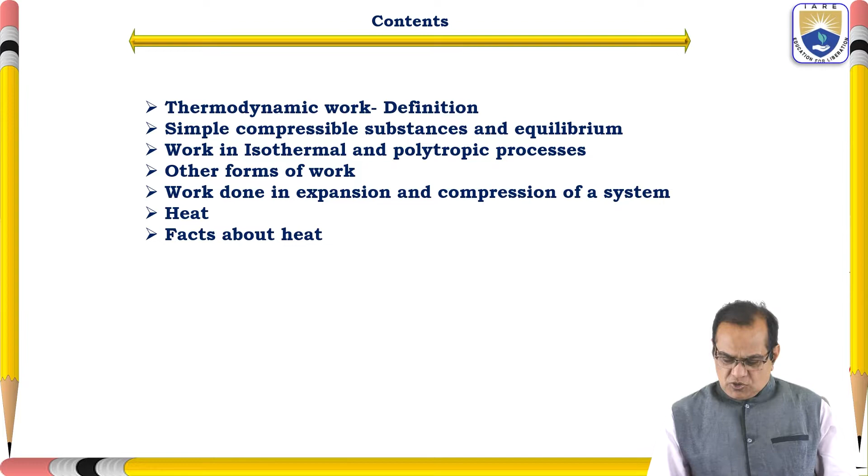So today I will go with thermodynamic work, its definition, a very important and very classical definition: work is done by a system if the sole effect on the surroundings could be that of raising a weight. We have to find the keywords here: the sole effect on the surroundings could be that of raising a weight.

Very important. We should understand it, then only we can apply the knowledge of work, and it is a could be, not 100%. Work is done by a system if the sole effect, the total effect on the surroundings could be that of raising a weight. So suppose this is your system, this line is the boundary of the system, and here we put some rope and some weight.

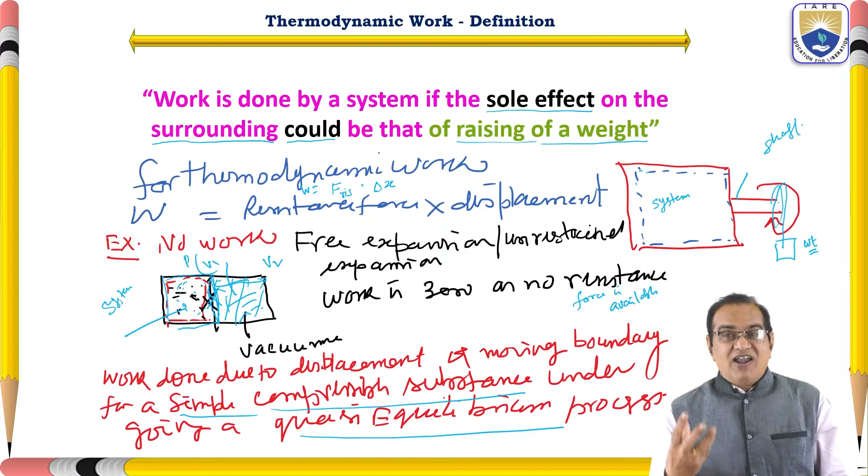So we have to understand what a simple compressible substance is. It is very essential that every student understands what a simple compressible substance is and what a quasi-equilibrium process is. Only if we understand these two things can we apply thermodynamic principles and equations, because all these equations are derived under these two conditions. So we have to see how it is happening.

So I will discuss here first simple compressible substance and equilibrium. Simple compressible substance: where only pressure, volume and temperature are significant, those cases we can deal as simple compressible substances. There is no electrical, there is no magnetic, these things are not considered. No surface tension, no other type of forces are considered. Only their thermodynamic properties like PVT and related to this PVT, like enthalpy, entropy, these things are only considered.

Those substances are called the simple compressible substance. So we should make sure that the process or the material or the substances which we use only follow PVT. They are not influenced by electrical force, magnetic forces, or gravitational or some other forces we are not considering. So most of our cases and all things which we are going to derive in the future classes, they all depend upon these simple compressible substances.

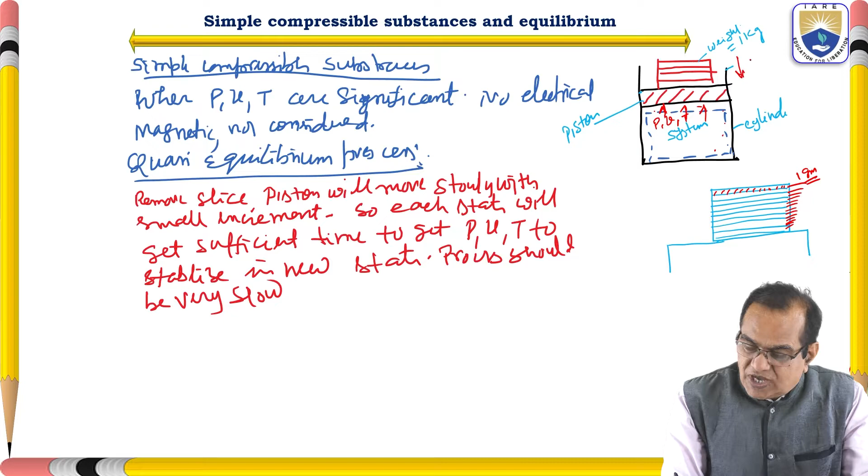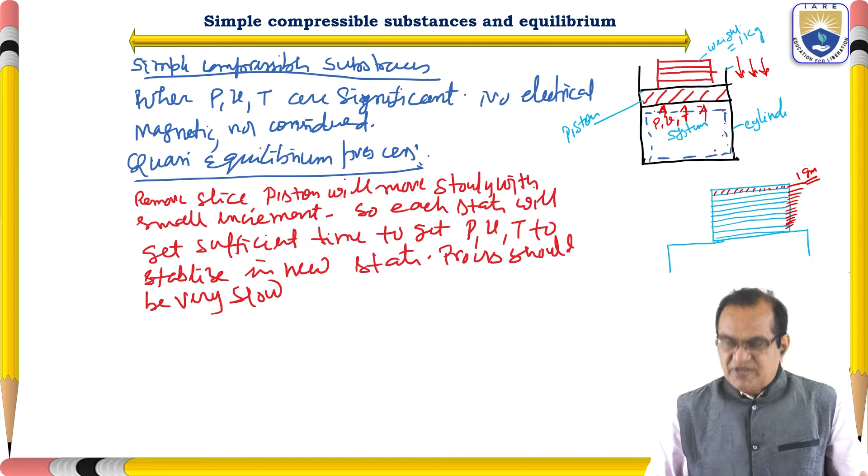Most of our discussion will be on quasi equilibrium process, because in this condition the resisting force is equal to the applied force. Applied force means the force acting from the bottom will be equal to the force acting on the top. So this is the equilibrium, meaning your state is in equilibrium. That is why it is called the quasi equilibrium process.

Now, work done by the system. This we have to understand, and see how the work can be done. So here I am showing two things. First is the isothermal process, and the second is the polytropic process. In isothermal process, PV is equal to constant. So here work done is always del W. We should not write dW. dW is the exact differential, but del W is inexact.

We should understand what is the difference between dW and del W. Del W indicates that it is inexact. It is not an exact differential. This will not give the point value; it has a path value. It depends upon the path. But dW depends upon the point.

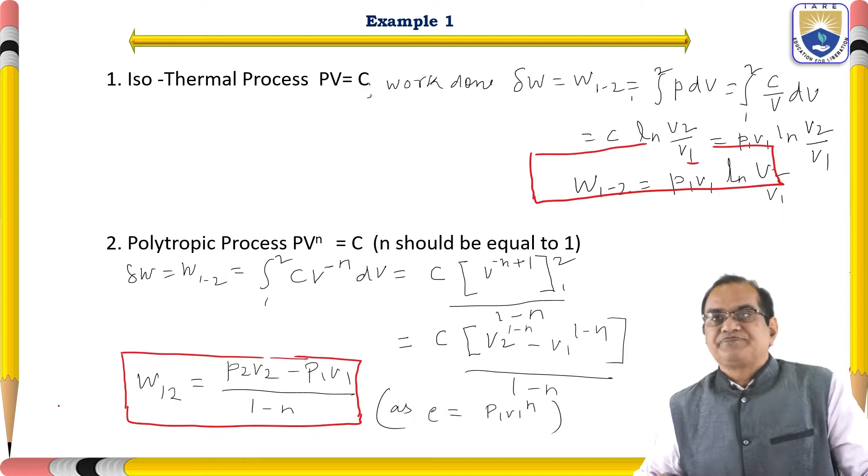So now I will go to the next issue, some other forms of work. We have done the simple PdV work, or thermodynamic work: isothermal, polytropic, constant pressure or isobaric, isochoric, all of which we can find out by the previous equations. But we have some other forms of work, like shaft work.

So if this is the shaft here, rotating with omega velocity, and there is a torque, what will be the work done? The rate of work done per unit time is equal to torque into omega, the rotational velocity. Work per unit time is called power. So power is equal to torque into rotational velocity omega. So this is shaft work, mechanical work.

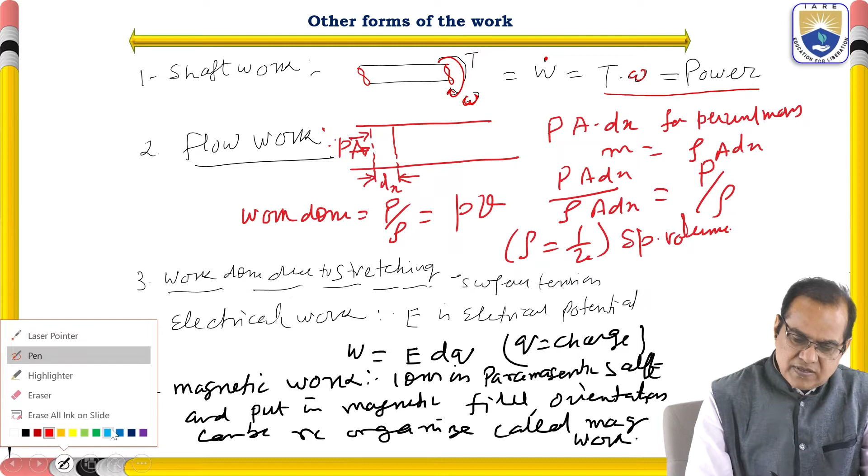Now if you see the flow work, you can see here that this is a pipe. Assume it is full of water. This is here one.

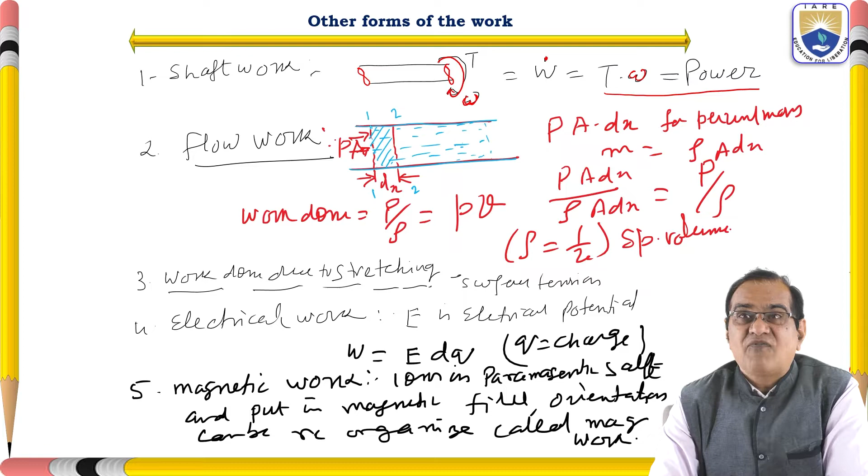The strip is here. So this is from 1, 1. It has moved to 2 and 2. Next point, 2 and 2. This first layer has to move from here to here. To move from here to here, on this side we need some additional force. Then only it will be moving. Okay, so here the pressure of the water is P, and the cross-sectional area, I am just showing here. This is the cross-sectional area. This area is A.

So how much force is applied here? It is P into A. This is the force. And how much distance is traveled? From 1 to 2 is delta X. So this is the work done. So work done is how much? PA into delta X, per unit mass. So M is equal to what? M is equal to density into volume. Density into area into dx.

So per unit mass, how much work is there? PA dx by rho A dx. A dx is cancelled. So here you will get P by rho. So work done per unit mass is equal to P by rho. And we know that rho is the inverse of the specific volume. So 1 by rho is equal to v. So here we got the flow work is equal to pressure into specific volume. Per unit mass, the work done is equal to pressure into specific volume. Very important, because this will be used in our future

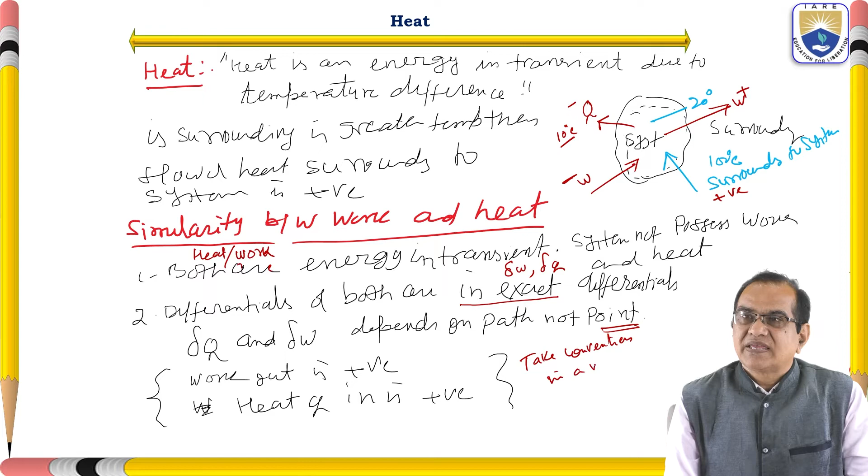The differentials of both are inexact differentials. Delta will be there, not d. So here δQ and δW depend upon the path, not on the point. Work out is positive, heat in is positive. This convention we have to take in a nice way. That we have to take care of.

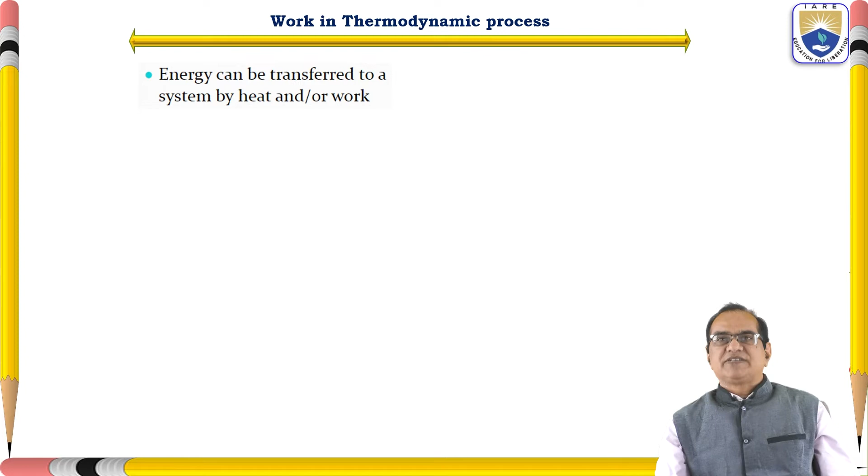So now I will give some important points on work in a thermodynamic process. Energy can be transferred to a system by heat or work. I am just summarizing what I have done. The system will be a volume of gas always in equilibrium. The system will always be inside the chamber, maybe air or gas or anything, and this will always be in equilibrium. Consider a cylinder with a movable piston.

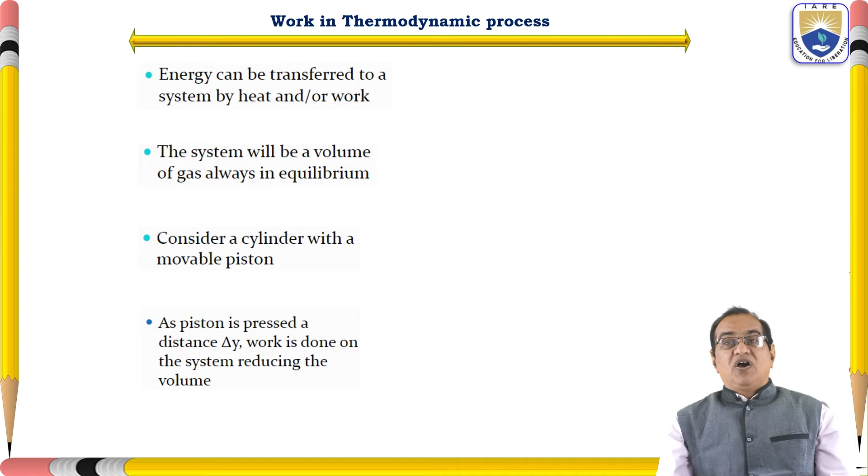A piston is pressed a distance Δy. Work is done on the system. So if the piston is compressed, work is done on the system, meaning it is negative work. You can see here there is a piston, there is a pressure and the volume. The volume is high here, and we have shifted this piston here. The volume is reduced now. This much you have gone down, so this volume is reduced.

So the pressure is positive. Is this work positive or negative? The work is negative because work is given. You see the arrow: we are pressing this shaft and it is compressed. So this work will be negative because V2 is less than V1. W is equal to P(V2 minus V1), so if it is less, W will be negative. A gas in a cylinder occupies a volume V at pressure P. Pushing the piston down compresses the gas, and this compression gives negative work, meaning work is done on the system, maybe by a motor pressing the piston.

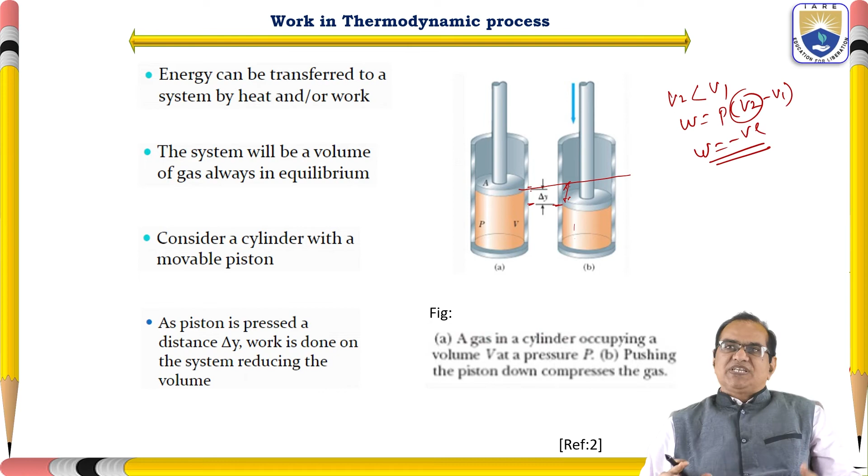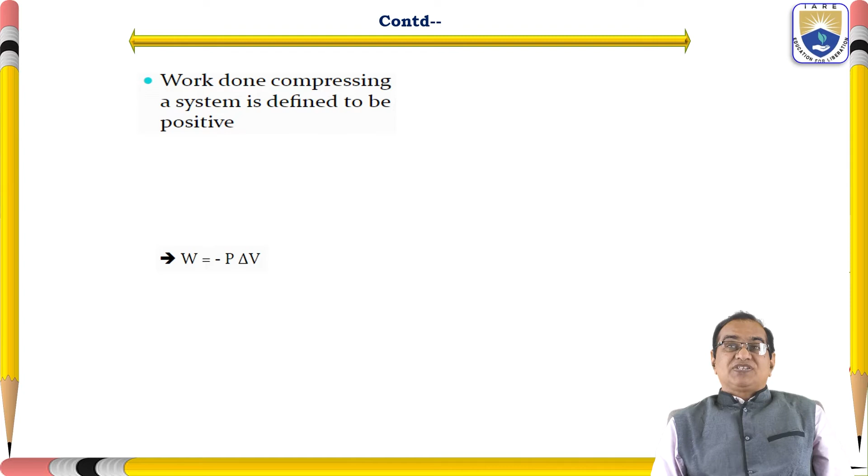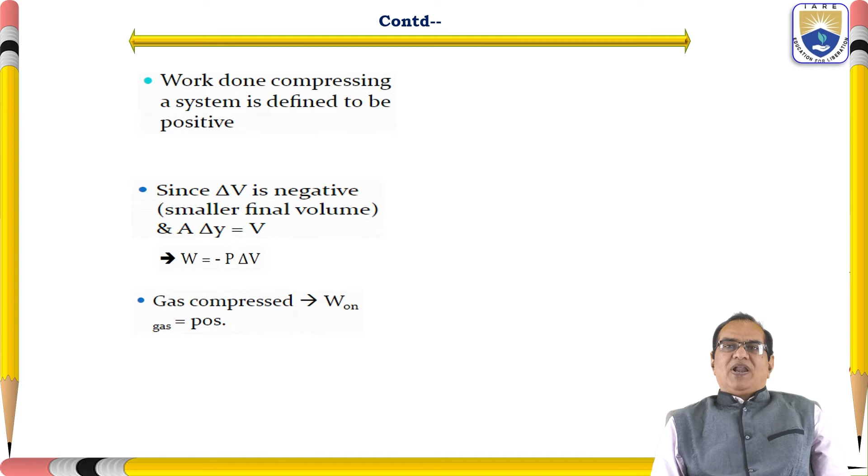Now we will see further. Work done compressing a system is defined to be positive. Since ΔV is negative, a smaller final volume, where A times Δy equals V, W is equal to minus P ΔV. Gas compressed, so work on the gas is positive. Gas expands, work on the gas is negative.

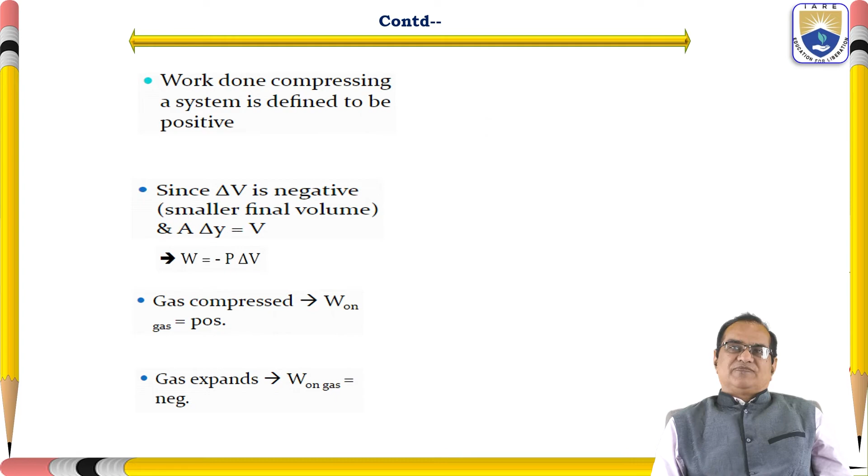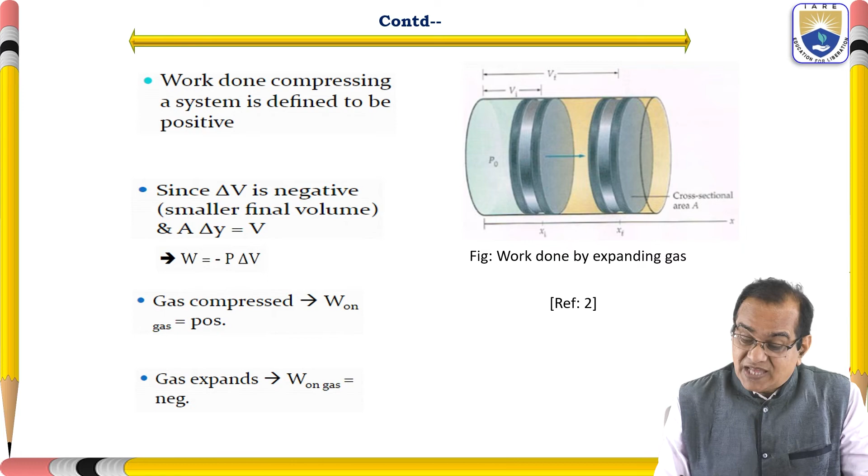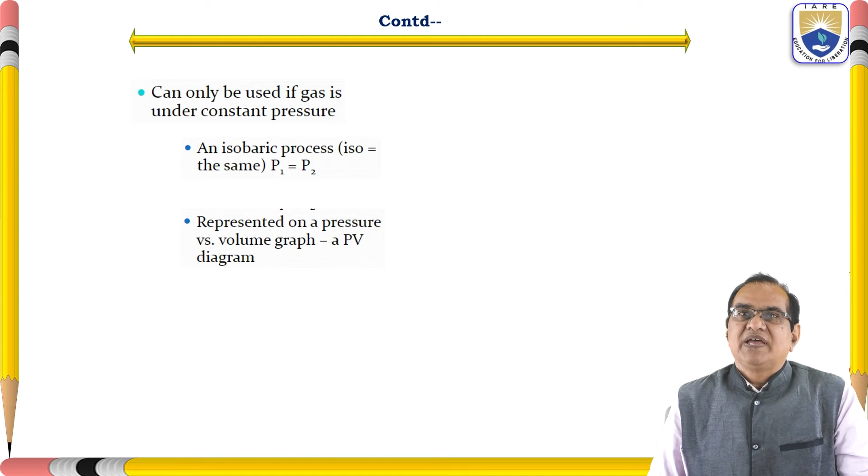This can only be used if the gas is under constant pressure. For this type of system at constant pressure, we can use an isobaric process where pressure is constant, that is, P1 is equal to P2. It is represented on a pressure versus volume graph, a PV diagram. The area under any curve is equal to the work done on the gas.

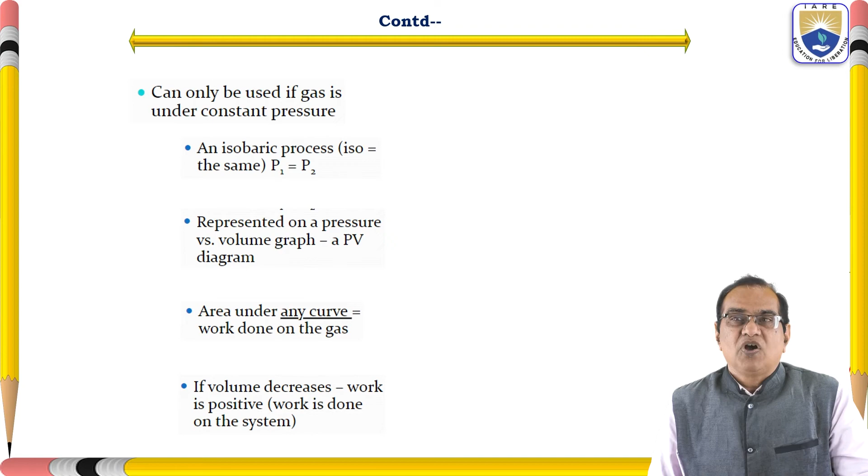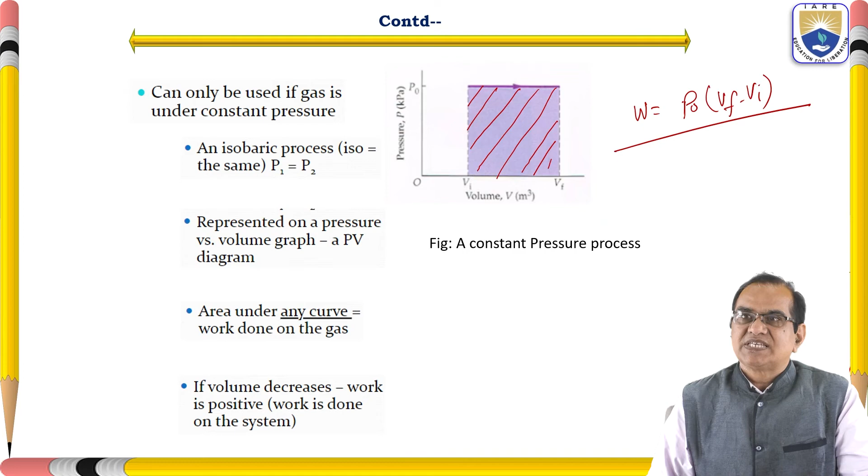This is the work done by a constant pressure process. You can see here a PV plot representing the constant pressure process shown in the figure. The area of the shaded region, that is P0 (Vf minus Vi), is equal to the work done by the expanding gases. So this much work is done by the expanding gases. Here I can give the reference.

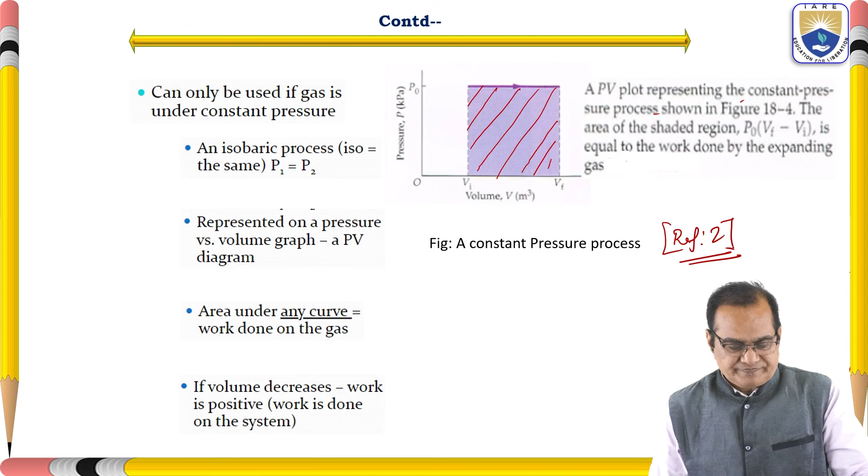Now I will discuss facts about heat. What are the facts about which we sometimes have confusion? That confusion has to be sorted out. Heat is energy that flows from something warm or hot to something cooler. Heat is always in transit, as I told. It will always move from the hot zone to the cooler zone. That we have to understand.

A hotter substance gives kinetic energy to a cooler one. So this is a transfer of kinetic energy. Hot will have more kinetic energy because molecules are moving very fast, and that is why it has more heat or higher temperature, and it will move from hot to the cool side. Heat is the transfer of energy between two objects due to temperature difference.

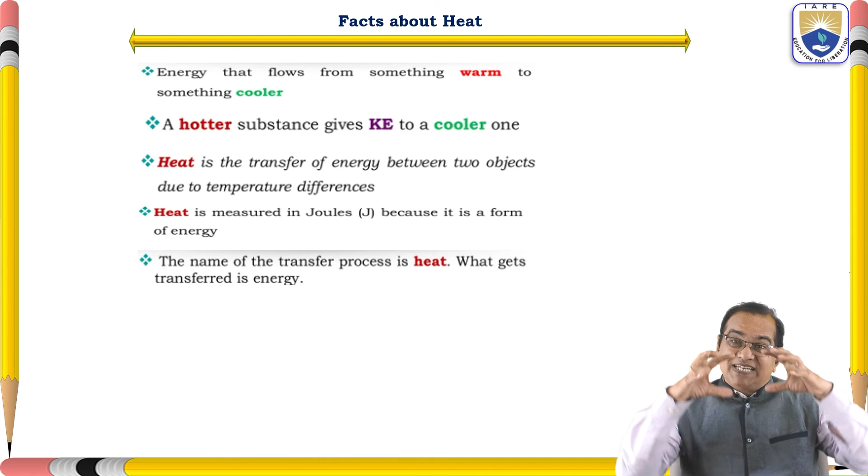Heat is measured in joules because it is a form of energy. Heat and work are both energy, and both have the same unit. The name of the transfer process is heat. This energy is inside, but when it is transferring, it is called heat. What gets transferred is energy, and the transfer is called heat.

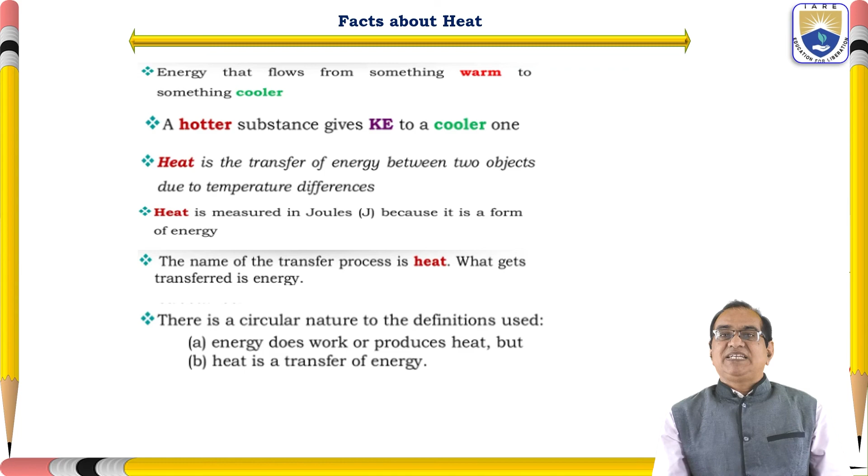There is a circular nature to the definition used. Energy does work or produces heat. Energy is the combination of work and heat, but heat is a transfer of energy. Very, very important facts are here. We should take care of this type of concept.

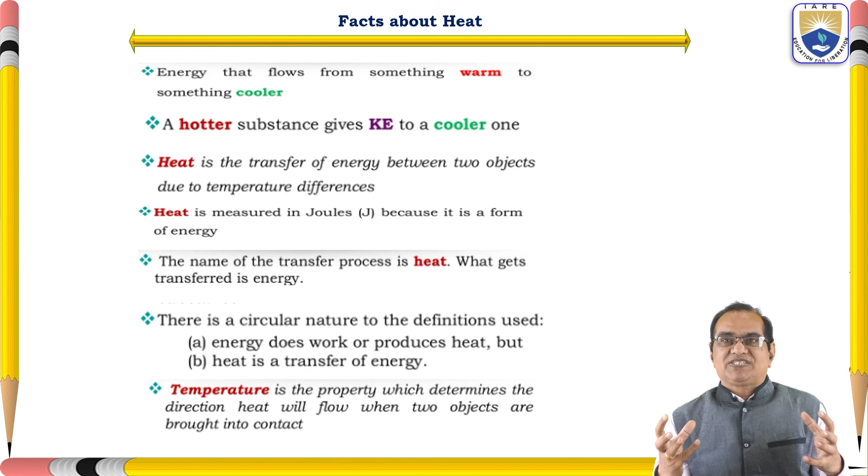Temperature. What is temperature? Heat will move from high temperature to low temperature. But what is temperature? Temperature is the property which determines the direction heat will flow when two objects are brought into contact. So if two objects are there, this is A and this is B, and this is at 100 degrees centigrade and this is at 30 degrees centigrade.

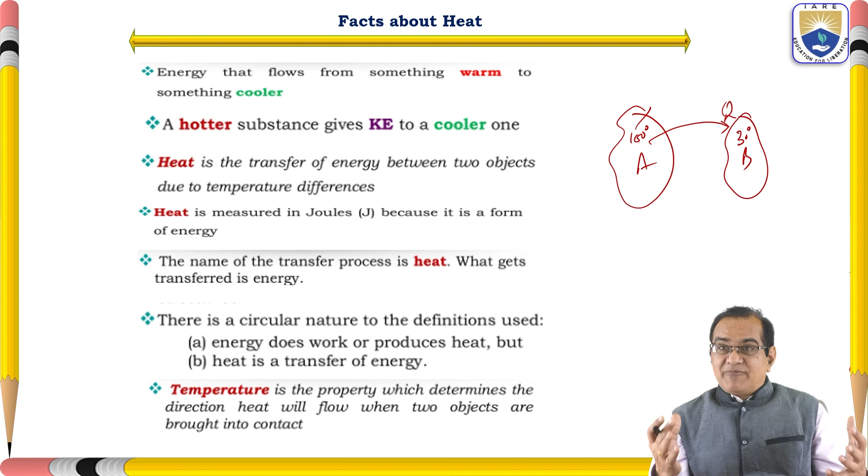So what will happen? Temperature is the property which determines the direction of heat. So this Q will move from high temperature to low temperature. So this is called temperature: the property which determines the direction heat will flow when two objects are brought into contact.

In my next topic, I am going to discuss one or two problems related to work and heat. Then in the next classes, I will go to the first law of thermodynamics, which is the conservation of energy. I am referring to the book by Cengel, Thermodynamics: An Engineering Approach, Tata McGraw-Hill. Also, today I have taken a few topics from slideplayer.com.